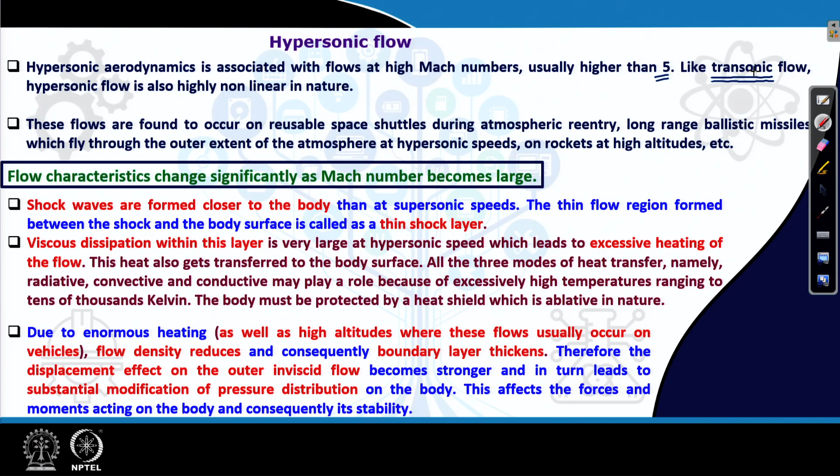Incidentally, the transonic flow that we saw around Mach 1, slightly lower and slightly above Mach 1, as well as hypersonic flow, they both have a common characteristic. Though incidentally, the free stream Mach number range is slightly on the lower side for the transonic flow, while here it is much higher than 1. They have a common nature in the sense of nonlinearity.

What do we mean by that? If we look at it from the mathematical perspective, if we looked at the governing equations, then you will be able to appreciate this better, in the sense that when we look at these two flow regimes and you try to discuss the governing equations from the point of view of small disturbances or small perturbations, you find that the governing equations can never be linearized. This gives the nonlinear nature from a mathematical perspective.

If you recall that in the subsonic regime or in the supersonic regime, when you talk about small disturbance or small perturbation flows, that means very small changes happen within the flow field because of presence of a body, then the governing equations can be linearized in these two regimes. For subsonic flows, for example, you have seen that under certain assumptions, the governing equation is Laplace equation, which is a linear partial differential equation.

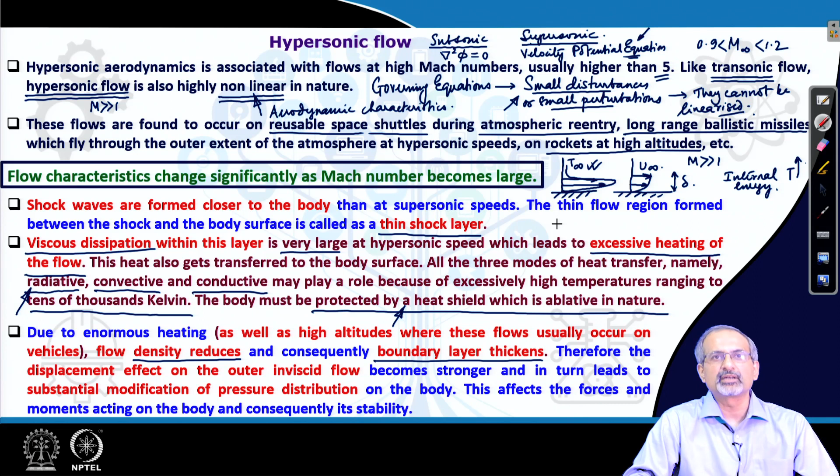The densities are much reduced compared to sea level conditions, and what happens is the boundary layer thickens up. Once the boundary layer thickness increases, the displacement effect is also larger, and it affects the outer inviscid flow, which gets displaced further, changing the pressure distribution on the body. If that change in pressure distribution occurs, it affects the forces and moments acting on the body, and it can have a serious issue with the stability of the vehicle.

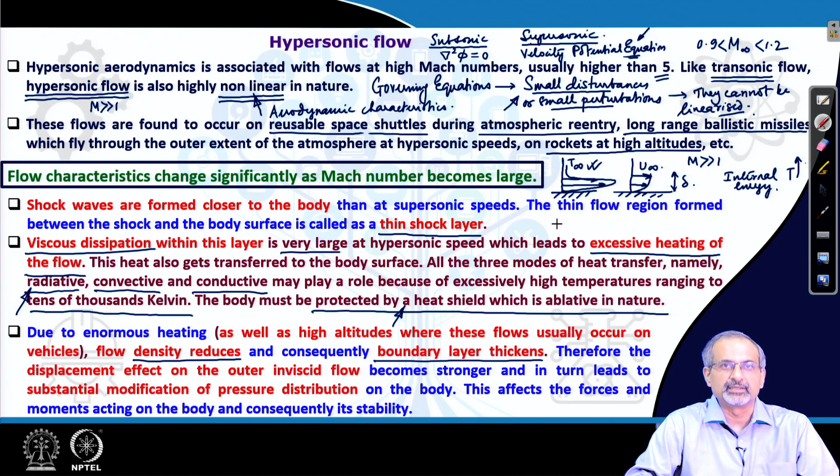So, we have started looking at different effects. We continue to discuss that. The flow can become chemically reacting. We said earlier that the gas can ionize at such Mach numbers, and thermodynamic characteristics may be altered significantly.

The calorically perfect gas assumption, that means Cp, Cv are constants, would not work at those conditions. Though it works for lower Mach number supersonic flows, it would not work at these Mach numbers, and both specific heats become functions of pressure and temperature in hypersonic conditions. You could dig a little deeper into kinetic theory of gases and try to get an answer to these questions, why it happens at higher temperatures.

Complex chemical reactions occur at the body surface if it is coated with an ablative layer for cooling purposes, which often is the case. So there will become complex chemical reactions. It is not only that the air is getting ionized, but the materials forming the ablative layer are also reacting. So the chemical reactions become very complex.

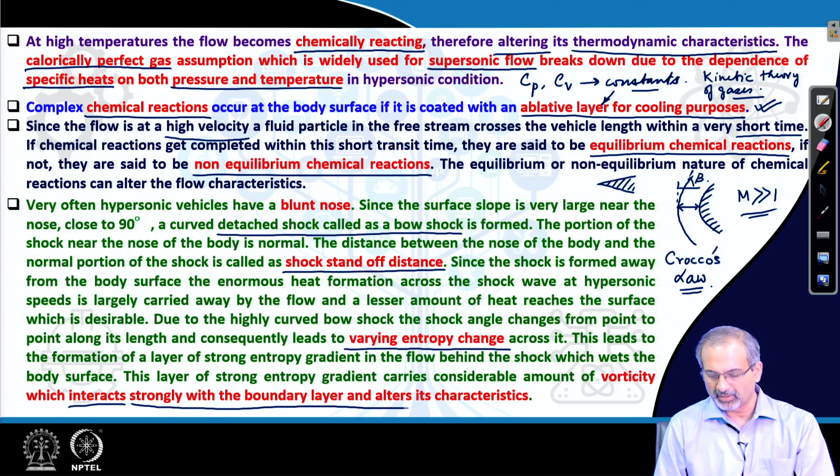You can try to explore a law which is called Crocco's law in this respect. If there is additional vorticity created behind the shock, remember it is inviscid flow that we are talking about, so it is a mechanism of generation of vorticity in an inviscid flow. In a real flow, there is also vorticity in the boundary layer, and this vorticity created by an inviscid mechanism can interact strongly with the boundary layer and alter its characteristics.

Well, we looked at quite a few interesting features of hypersonic flow. Let us also look at some numbers.

So what we are going to do is take some equations we developed earlier for supersonic flows, and bluntly impose the Mach number tending to infinity limit to see what happens. When we look at the exact normal shock relations for supersonic flow, we impose the condition that m1 tends to infinity, and then what do we get?

The downstream Mach number behind a normal shock occurring with infinitely large upstream Mach number is 0.378. We are still assuming gamma to be 1.4, which is a questionable approximation, but for simplicity we have done that. Why is it questionable?

We already said that Cp, Cv cannot be considered constants. They are a function of pressure and temperature, and therefore would change from 1.4. You would find that when the Mach number grows larger, temperatures increase significantly, and gamma tends to reduce, getting closer to 1.3, 1.2 of that order.

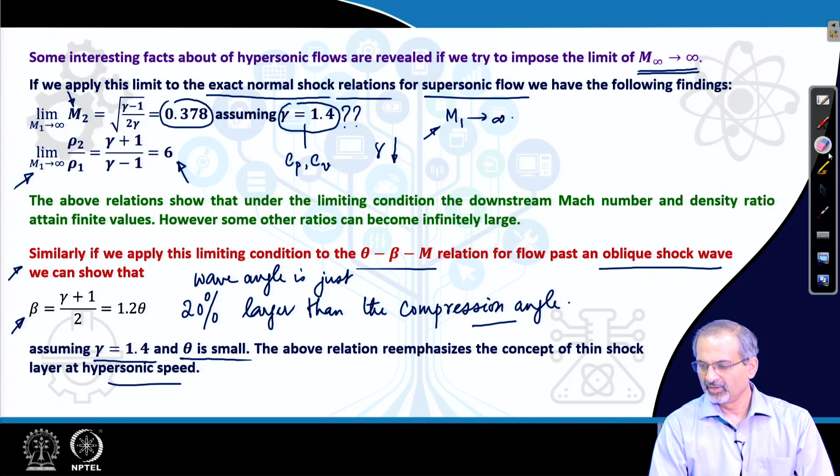What does this convey? It re-emphasizes the concept that a thin shock layer is produced at hypersonic speeds. So we have discussed quite a few interesting features of hypersonic flow.

Now let us discuss an experimental apparatus of enormous use for exploring hypersonic flows, though it is not confined to hypersonic studies alone, it is also used for supersonic flows. Additionally, there are wind tunnels and shock tunnels dedicated for hypersonic and supersonic studies, which we will look at later in the course.

Shock tubes are useful instruments for conducting gas dynamic studies, and they find important applications in the study of high temperature gases, which we already understand occur in hypersonic studies. In this device, unsteady wave motion is studied.

What is the characteristic of this apparatus? It looks comparatively simple. It is a long metallic tube closed at both ends, with a diaphragm separating a region of high pressure gas from a region of low pressure gas. The gases in the two regions can be different, even maintained at different temperatures, and if different gases, they would have different molecular weights.

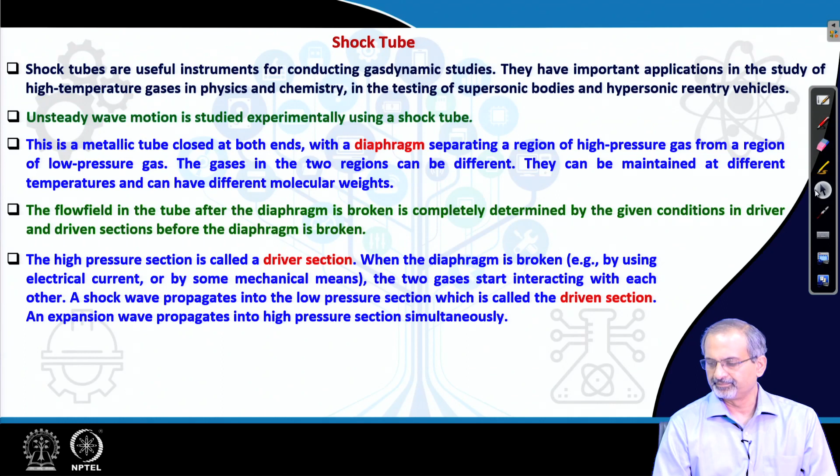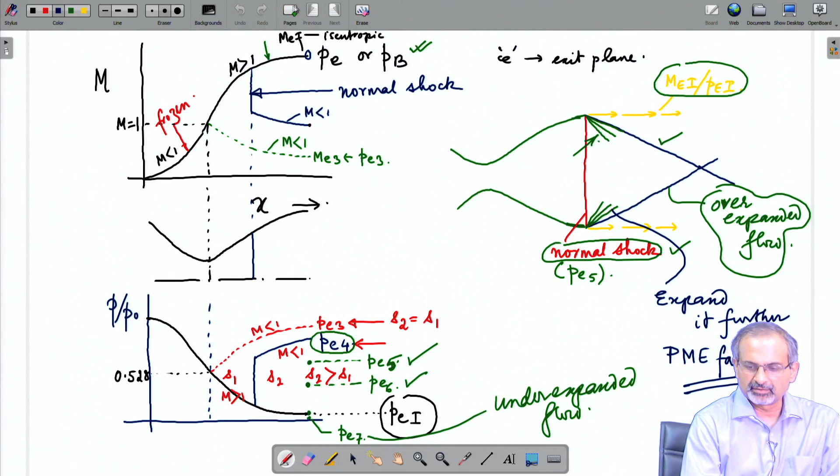Before we proceed further, it may be a good time to draw a sketch of a shock tube. As I said, construction-wise it looks pretty simple, but that should not distract us, since there are a lot of accompanying complexities in its design and instrumentation.

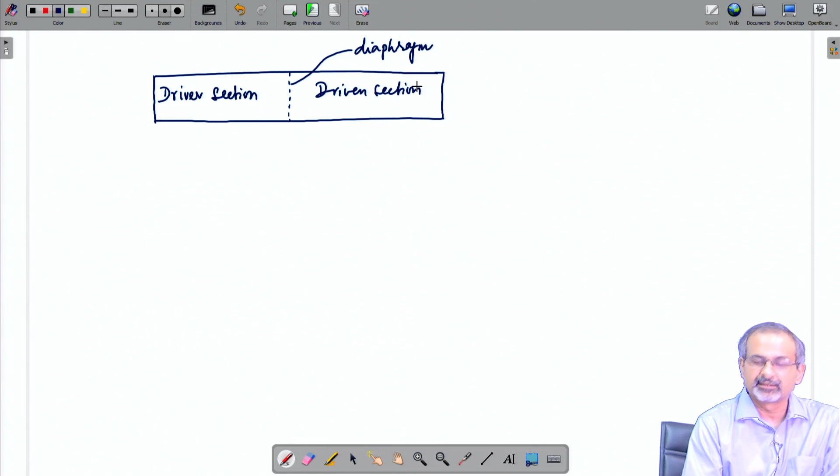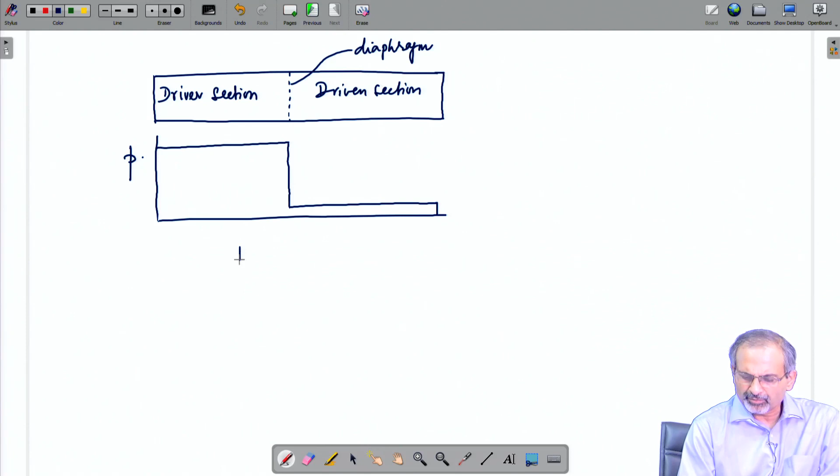So this is the driver section, this is the driven section. There could be two different gases, but the most important thing is that the driver section gas is at a much higher pressure than the driven section gas. If we make a pressure plot, it would look like this - this is before diaphragm rupture.

So what happens when the diaphragm ruptures? If we look at the flow after a few instants, how would it look? Let us try to draw it.

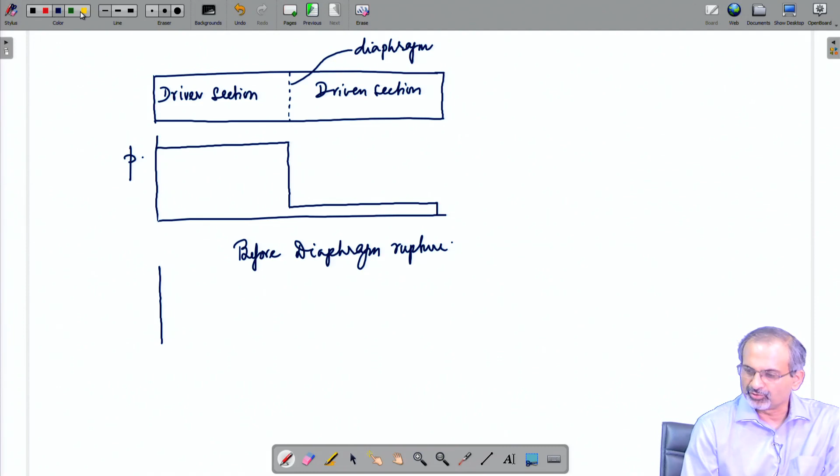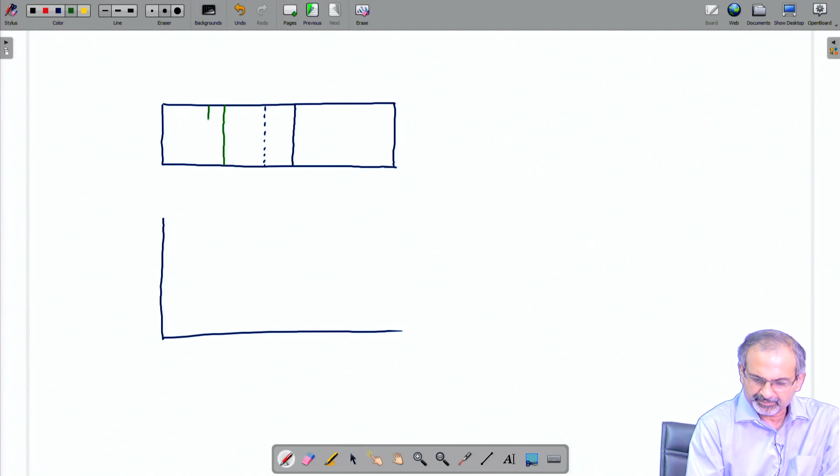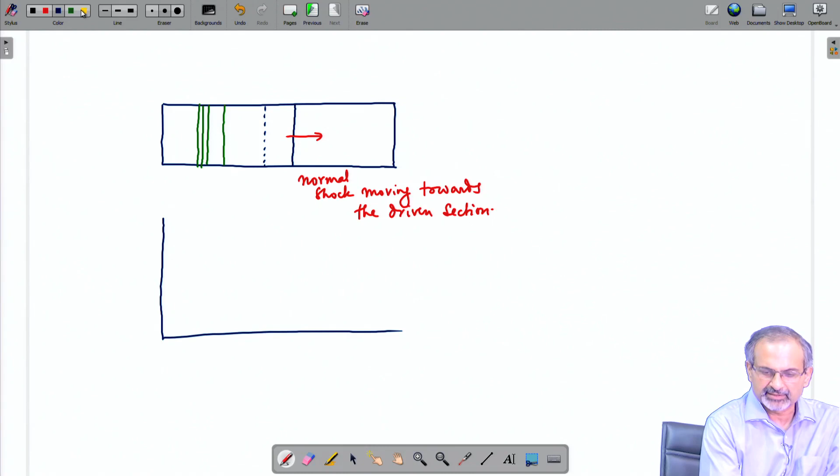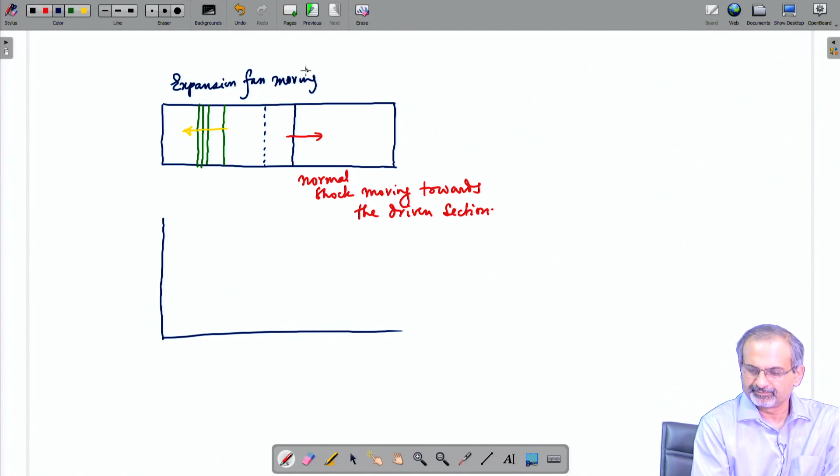So we are looking at the flow after a while, by which time the diaphragm has ruptured. What are we seeing? We are seeing a normal shock moving towards the driven section, and simultaneously we are seeing an expansion fan moving towards the driver section.

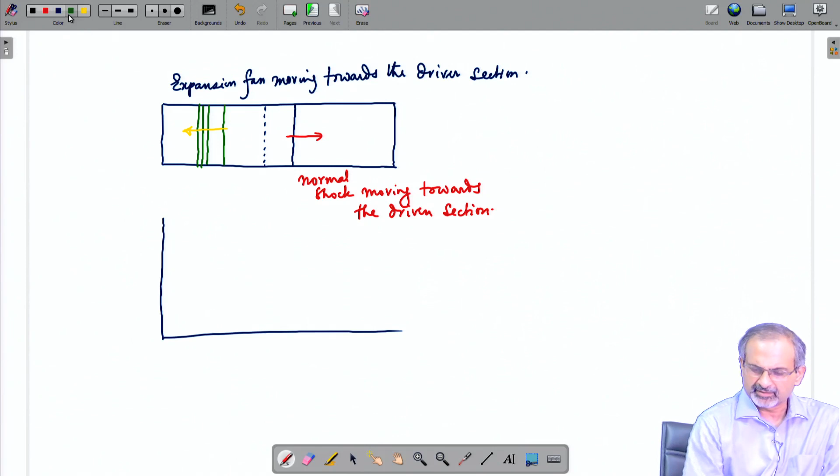There is another interesting entity here called a contact surface. The flow behind the normal shock gets dragged - you have an induced motion produced behind the moving normal shock. We will discuss this once again when we look at the slides where we have a write-up on all this.

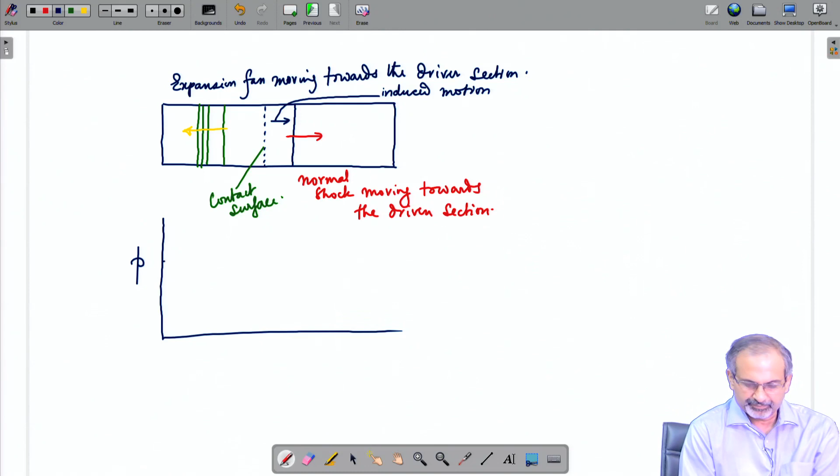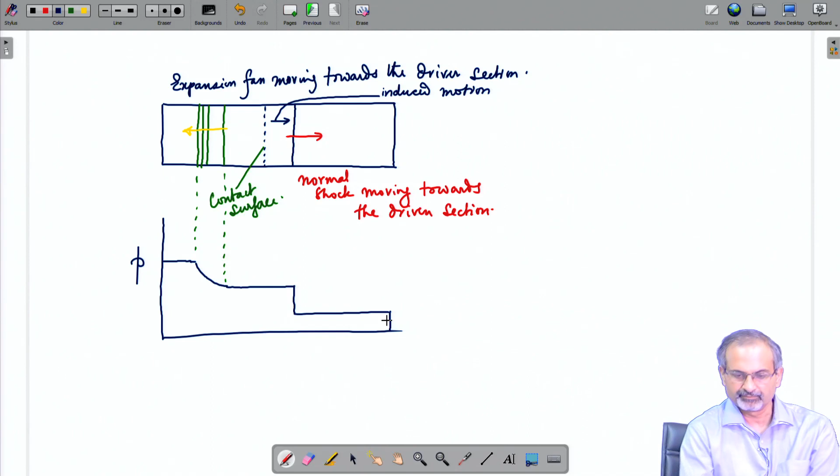We will try to mark it appropriately so that you can see the variations, how they are occurring. So, that is how it is. So, what do you notice?

As the shock is moving into the driven section, there is a large pressure jump across the shock. There is a gradual pressure change across the expansion fan, with no sudden change, because the expansion fan is accompanied by an isentropic change, and therefore the property variations are smooth.

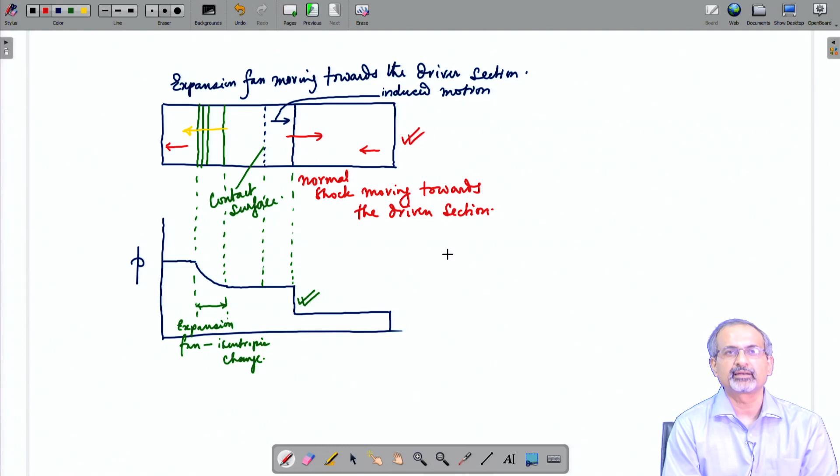So this is how the flow looks a few milliseconds after the diaphragm has ruptured. After some more time, the shock reaches this end of the shock tube and reflects back. The expansion fan reaches the other end and also reflects back as an expansion fan. The waves are reaching solid walls and reflecting back in the same manner - a shock reflects back as a shock, an expansion fan reflects back as an expansion fan.

We go back to the write up again. Now that we have seen the pictures, we recall that as the normal shock propagates, it increases the pressure of the gas behind it and induces a mass motion.

The interface between the driver and driven gas is a contact surface. That is an interesting entity. Across it, the entropy can change discontinuously, but such a layer cannot sustain changes in pressure or velocity. So pressure and velocity jumps are not sustained - it is only entropy which can change abruptly across a surface like that.

You can also explore a term called slipstream in your spare time as homework - what this means and whether it has a connection with contact surface.

Eventually, the normal shock reaches the end of the shock tube and it reflects back. We discussed this and how shock reflection occurs from a solid boundary. Earlier, in the context of shock wave boundary layer interaction, we discussed how a compression wave reflects back from a constant pressure region as an expansion fan - that was an opposite nature.

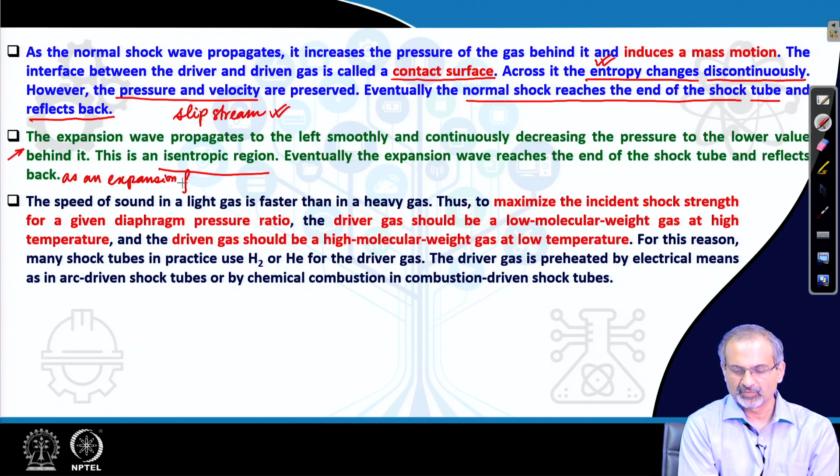Let us look at the next point. The expansion wave propagates to the left smoothly and continuously, decreasing the pressure to the lower value behind it. This is an isentropic region, and eventually the expansion wave reaches the end of the shock tube and reflects back as an expansion fan, just for the sake of completeness. We are mentioning that. Now comes a very important point.

which is very important for the designers of shock tubes and users. We need to understand that speed of sound in a light gas is faster than in a heavy gas. Try to figure out again why this happens - I leave it as homework for you. You already know a lot about sound wave propagation, so you should be able to figure it out now.

Having accepted this fact, we state that to maximize the incident shock strength for a given diaphragm pressure ratio, the driver gas should be a low molecular weight gas at high temperature, and the driven gas should be a high molecular weight gas at low temperature. This is a very important fact for designers and users of shock tubes. We talked about the pressure difference across the diaphragm before it ruptured - we call that pressure the diaphragm pressure ratio.

So you have the driver section pressure here and the driven section pressure here. Sorry, this should be driver - let us correct it, we will rewrite this. So this is driver and this is driven. The pressure ratio between driver and driven gives you the diaphragm pressure ratio. So if this is a fixed value based on what has been chosen by the designers, under that constraint, how do you maximize the incident shock strength?

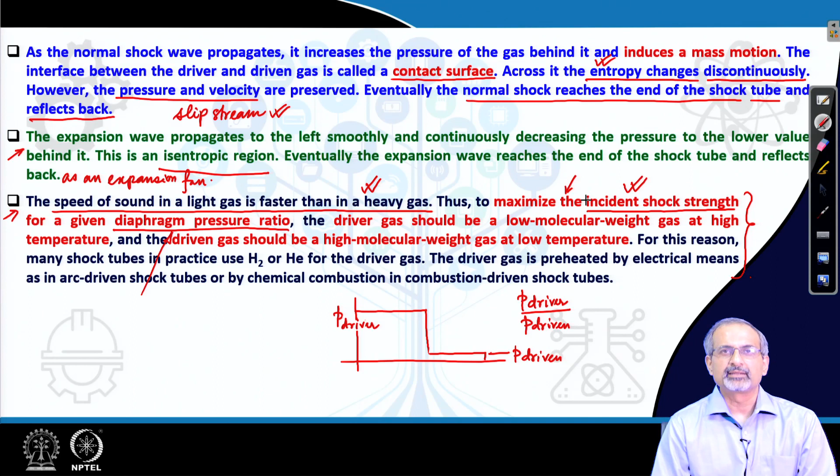We have a guideline that you have to have a high temperature lighter gas in the driver section and a low temperature heavier gas in the driven section. In that case, the incident shock strength will be high. For this reason, many shock tubes use a lighter gas like hydrogen or helium in the driver section, and they are even preheated - either by electrical means in arc driven shock tubes, with an electrical arc heating up the gas, or by chemical combustion in combustion driven shock tubes. So if you raise the temperature of the gas before running the shock tube by rupturing the diaphragm, this is what is called preheating.

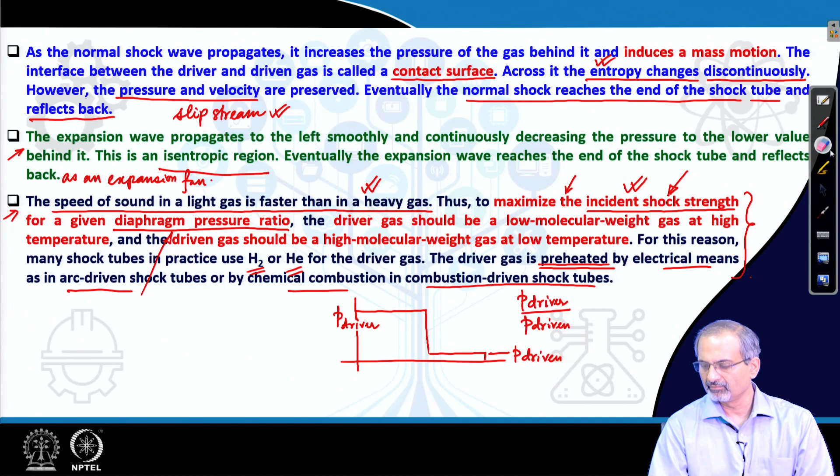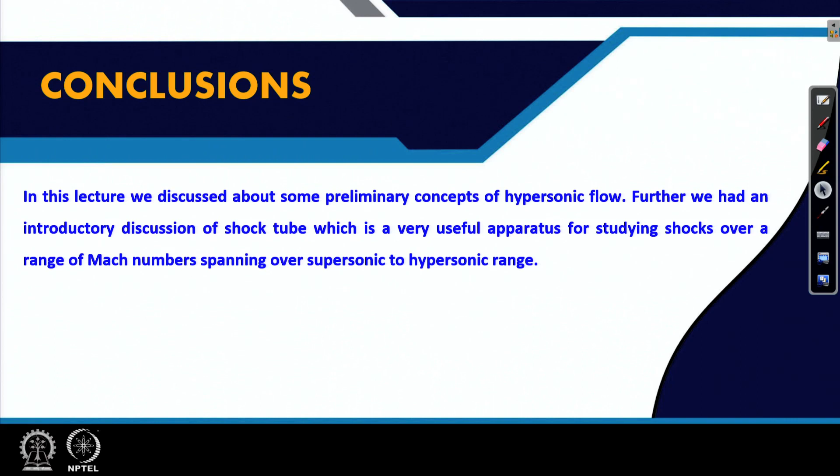So in this lecture we discussed some preliminary concepts of hypersonic flow. Further, we had an introductory discussion of the shock tube, which is a very important apparatus for studying shocks over a range of Mach numbers, spanning supersonic to hypersonic range. Thank you.